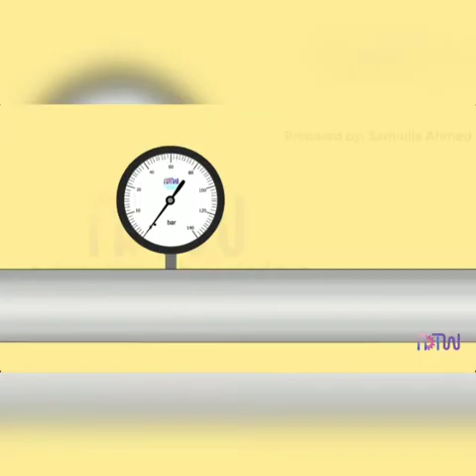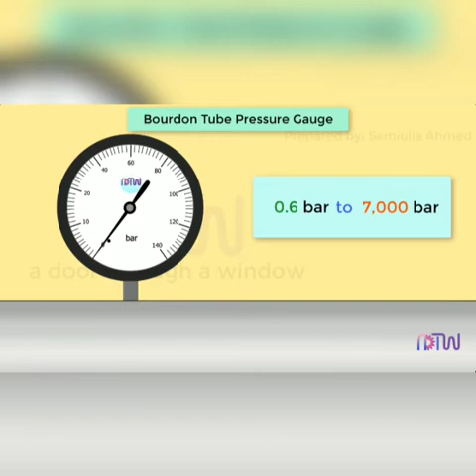Bourdon tube pressure gauge. Bourdon tube pressure gauges are used for measurement of pressure from 0.6 bar to 7000 bar. They are classified as mechanical pressure measuring instruments and thus operate without electrical power. This video works out the following.

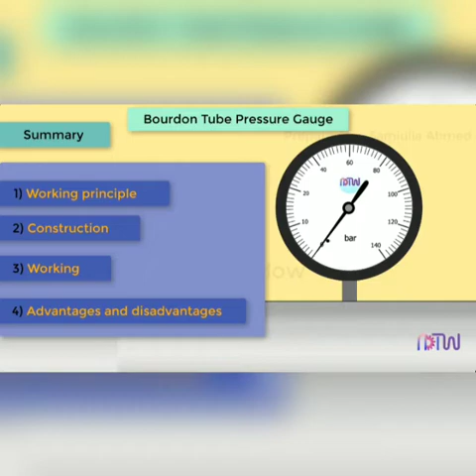First, working principle. Second, construction. Third, working. Fourth, advantages and disadvantages. Working principle of Bourdon tube pressure gauge: when an elastic transducer such as a Bourdon tube is subjected to a pressure, its deflection is proportional to the measured pressure.

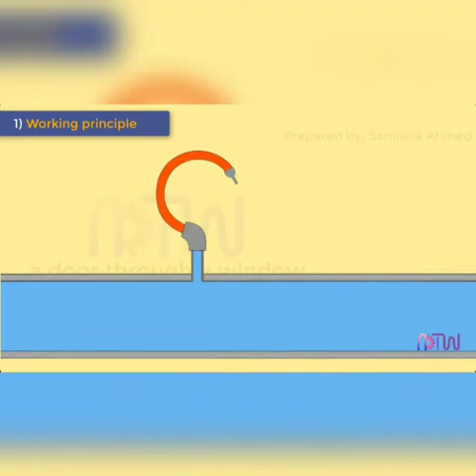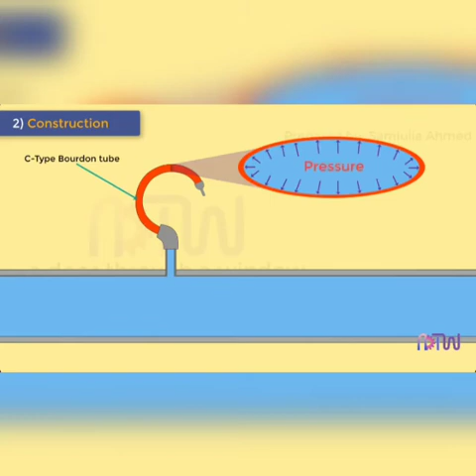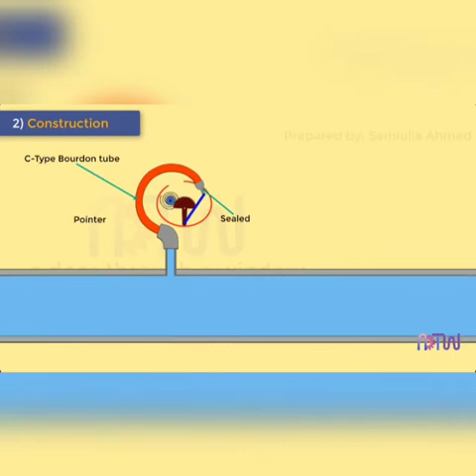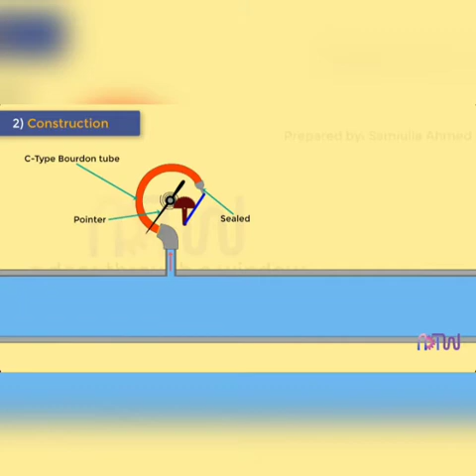Second, construction. C-type Bourdon tube consists of a long bent cylinder of oval cross section which is sealed at one end. This tube is made of materials such as phosphor bronze, steel, beryllium copper and attached by link mechanisms which operate the pointer. The other end of the tube is open for application of the pressure which is to be measured.

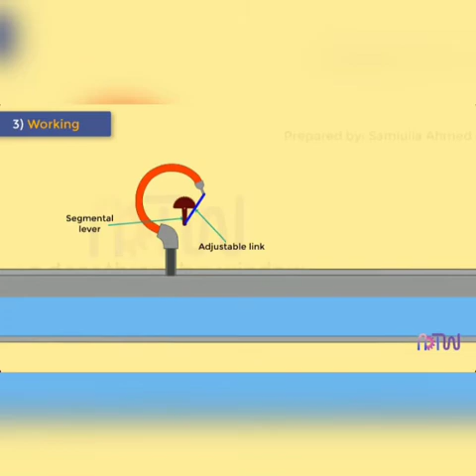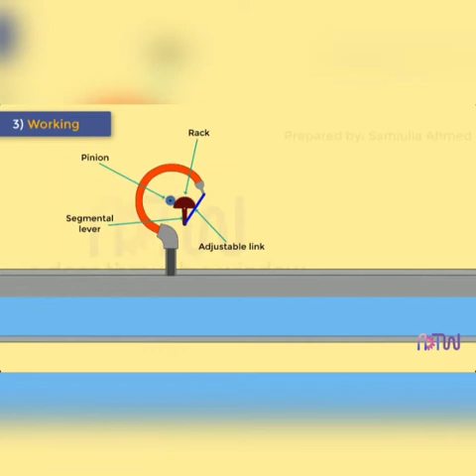The tube is soldered or welded to a socket at the base through which the fluid whose pressure is to be measured enters the C-type Bourdon tube. Working of Bourdon tube pressure gauge. As the fluid under pressure enters the Bourdon tube, it tries to change the cross section of the tube from oval to circular, and this tends to straighten out the tube.

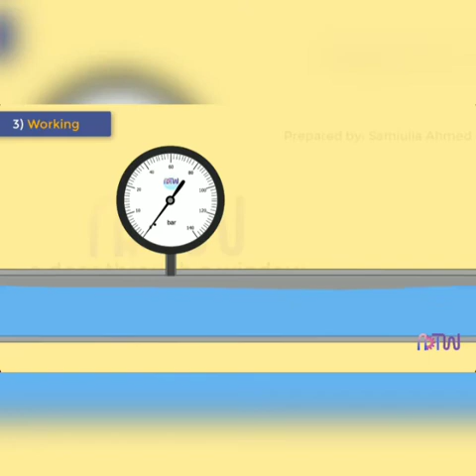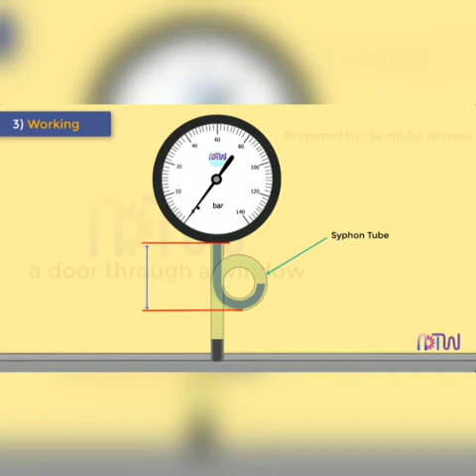The tip of the Bourdon tube is connected to a segmental lever through an adjustable link. The segmental lever end on the segment side is provided with teeth which mesh with a suitable pinion mounted on a spindle which holds the pointer. The resulting movement of the free end of the tube causes the pointer to move over the scale.

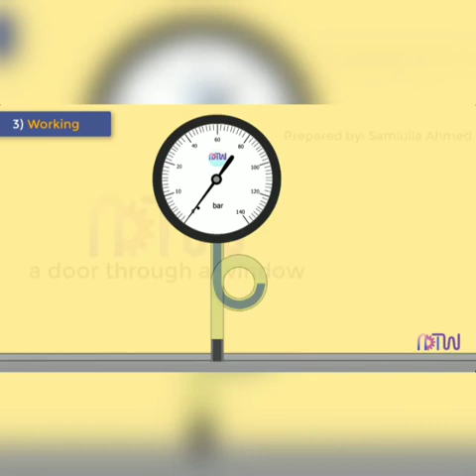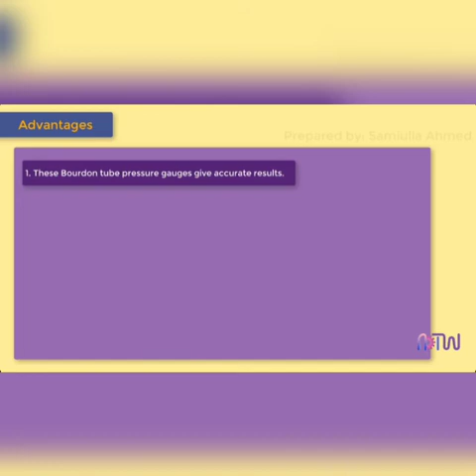In real life applications, pressure gauges are mounted with a siphon tube. A siphon tube is a simple device used to protect a pressure gauge from high temperature media such as steam. It can also be used to reduce the potentially damaging effect of rapid pressure change. When first installed, the siphon should be filled with water or some other suitable separating medium. This medium continuously remains in contact with the Bourdon tube.

Bourdon tubes are generally made in three shapes. First, C-type, second, helical type, and third, spiral type. Advantages of Bourdon tube pressure gauge are: first, this Bourdon tube pressure gauge gives an accurate result. Second, the cost of Bourdon tube pressure gauge is low. Third, Bourdon tubes are simple in construction.

Fourth, they can be modified to give electric outputs. Fifth, they are safe even for high pressure measurement. Sixth, accuracy is high especially at high pressure. Disadvantages of Bourdon tube pressure gauge: first, they respond slowly to changes in pressure. Second, they are subject to hysteresis. Third, they are